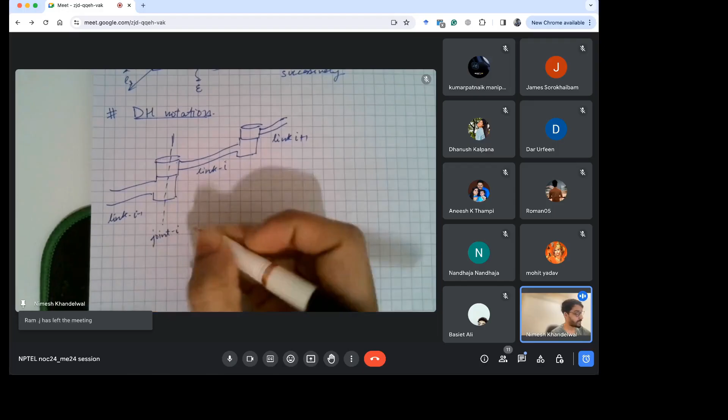According to the convention we are going to use, similar to the convention in J.J. Craig, we will mark the axis between link I minus 1 and I as joint I, not joint I minus 1, because this is the convention we had chosen. In the Schilling convention, this is called joint I minus 1, and the ith joint is between link I and I plus 1, but we are not going to use that convention. And this is joint I plus 1.

So currently we are just revising how to specify the axes, the local axes at every joint according to DH notation. We'll come to DH parameters after that.

So what do we do then? We assign the z-axis at every joint along this joint axis that we have just specified. So the z-axis is aligned with the joint axis, and it is from link I minus 1 to link I usually.

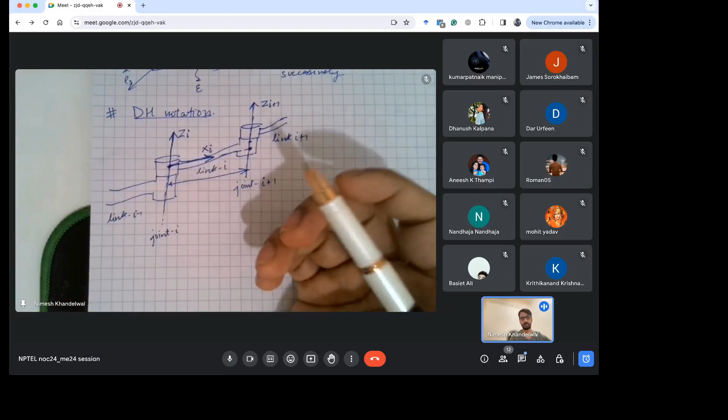And then what we do is we make a common perpendicular between zi and zi plus 1. Along this common perpendicular is xi. And the shortest distance between both these joint axes will also be along the common perpendicular, and that we notify as a.

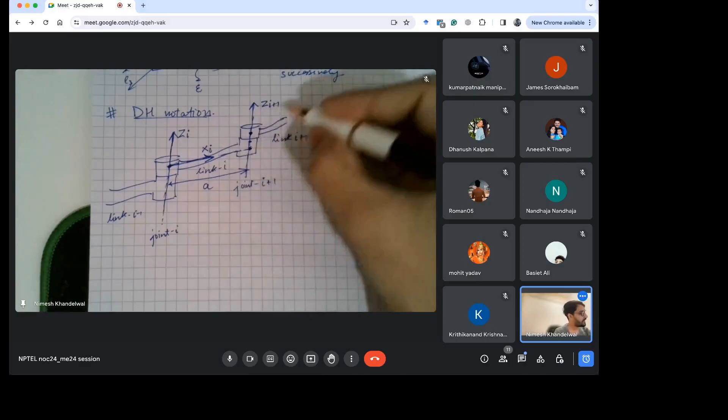I don't think there should be any trouble till now. Similarly, starting with link I plus 1 and between the common perpendicular of zi plus 1 and I plus 2, there will be some other frame. Some dummy frame I'm drawing right now that will help us define xi plus 1. So it is not important that this xi is along your link I. What is important is this xi is along the common perpendicular of zi and zi plus 1.

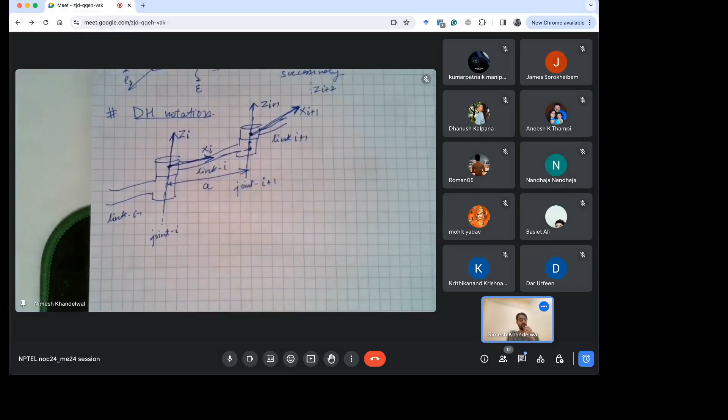So we had already talked about frame transformations in the previous week, right? It's what we initially started with. How do we transform frames? What we usually do in robotics is we want to know how to shift between different frames, how to shift quantities between different frames. If there is some point of interest that I can represent in, let's say, frame I minus 1, how does that point look when I see it from frame I? That is the usual problem.

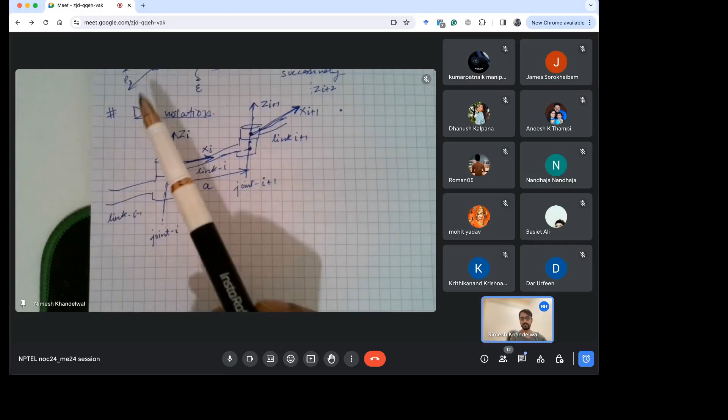There can be successive transformations also related, that if there is some random frame, let's say I plus n, and I can represent a point in that frame, then how does that point look when I see it from, let's say, I plus 1 frame, or ith frame? So for that we need transformation matrices.

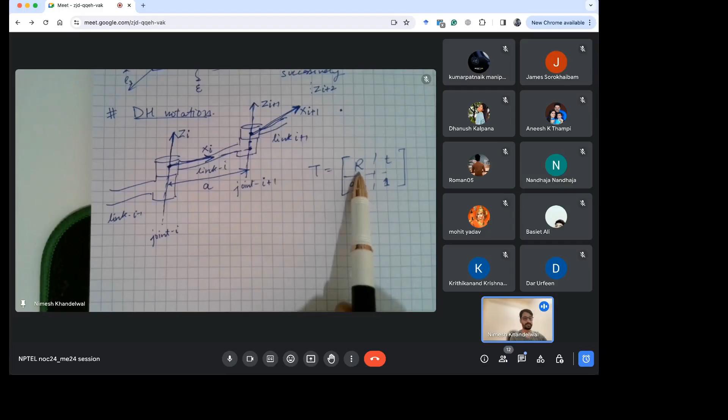You already know that a transformation matrix is defined by a rotation and a translation. So what we need is the rotation matrix between the two frames and the total translation between the two frames. And we already know that we can compose transformation matrices: if from frame 1 to 2 the transformation matrix is T12, and from frame 2 to 3 the transformation matrix is T23, then I can compose them to get the transformation matrix between 1 to 3 just by simple multiplication of the two.

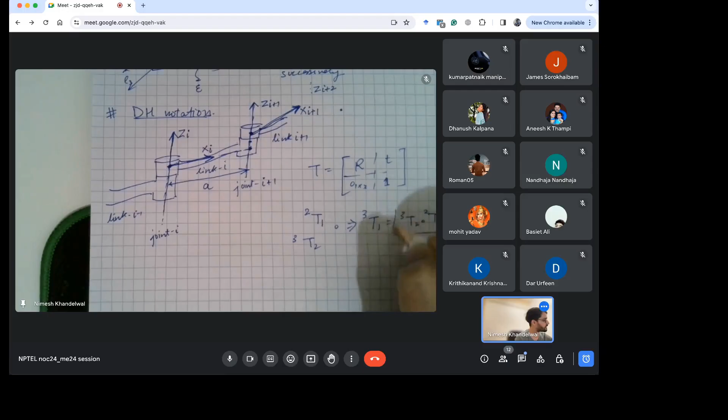Okay, why? Because we have defined a multiplication operation on this set, right? That we also discussed helped us define the SE3 set, the special Euclidean group. So R belongs to SO3 and T, the complete homogeneous transformation, the general rigid body transformation, in this case belongs to SE3 group.

Okay, so all this till now is just what we have learned previously, and I've just revised how we attach axes, joint axes according to the DH notation. Now what will come on to next is DH parameters. Why DH parameters? Because DH parameters help us easily identify these transformation matrices for robots.

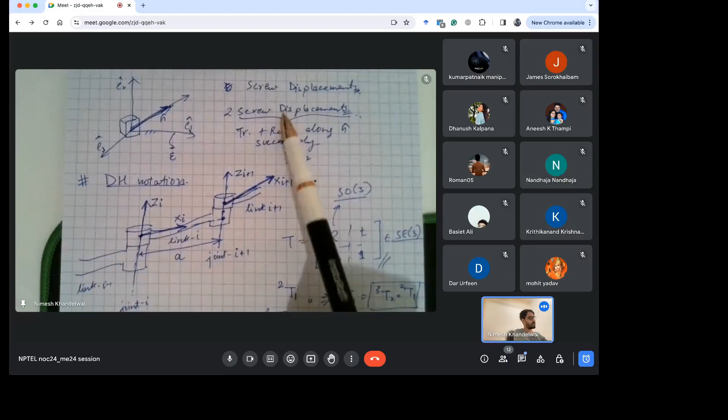For which we can identify the DH parameters correctly, then we can write these transformation matrices much easily. And how do we do that? So I'll first come to DH parameters, then I will discuss how to go from frame I, joint frame I, to joint frame I plus 1. You need to perform two screw displacements that we talked about here, right? That will also clear up the screw displacements a bit for you guys. Then I think we'll move on to discuss some problems.

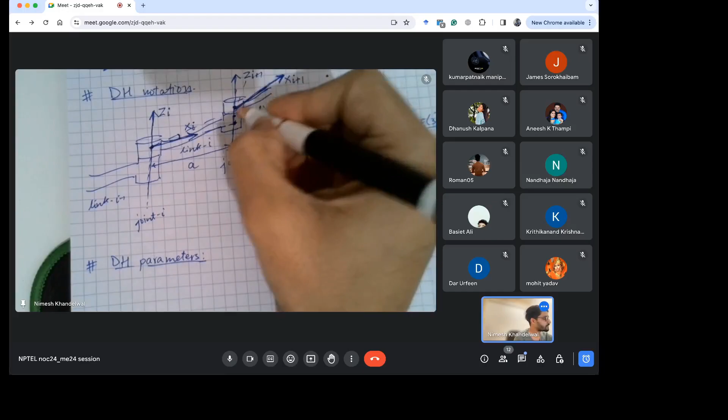Okay, so yeah, DH parameters. There are 4 parameters as has already been discussed, right? So the first one is A, that is the length of the common perpendicular between Zi and Zi plus 1. It is called the link length, the distance between Zi and Zi plus 1 along xi, along the common perpendicular.

Yeah, that's what I'm doing actually, Mohit. Is there any specific detail that you want about them, or is this the exact thing you want, like how do we define DH parameters? So I had already discussed about DH notation, how do we assign frames, joint frames according to DH notation. What I am going through right now is how we define DH parameters based on DH notation.

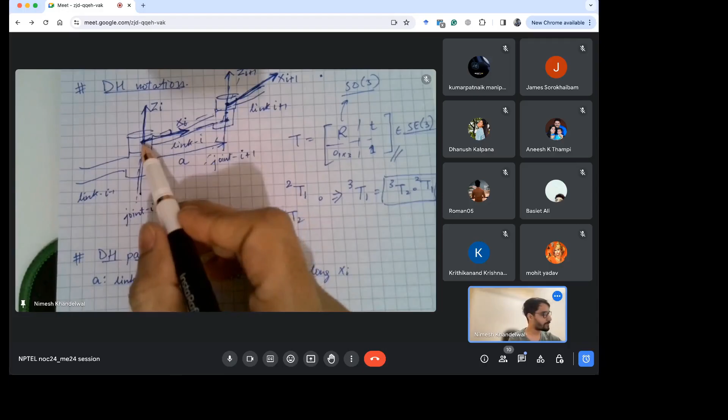So for DH notation, we just assign the Z axis at the joints, and then we assign the xi along the common perpendicular of both the joints, and the length of this common perpendicular is A. This is the first DH parameter.

And then we have alpha. Alpha is called the joint twist. What is alpha? It is the angle between Zi and Zi plus 1 about the same axis xi.

Okay, so these are your first 2 DH parameters, and this is the first set of screw displacements needed to go from joint frame I to joint frame I plus 1. But we are not there yet.

To completely define this transformation, the rest of the 2 parameters are your link offset. So the link offset is the distance between xi and xi plus 1. If I just extend xi here, this distance between them, this is link offset, this is D, and we can just assign I to all of them. This is about Zi plus 1.

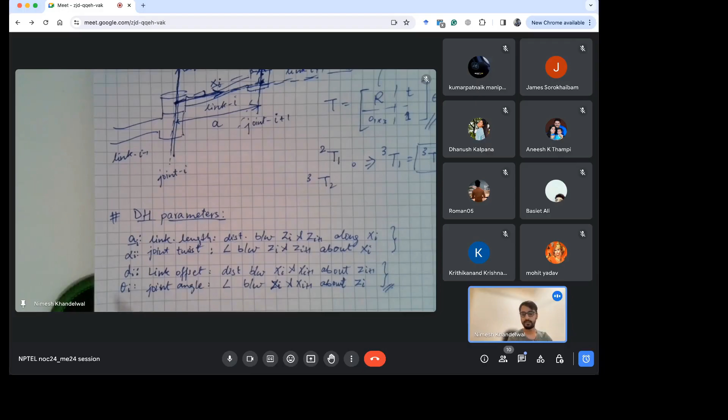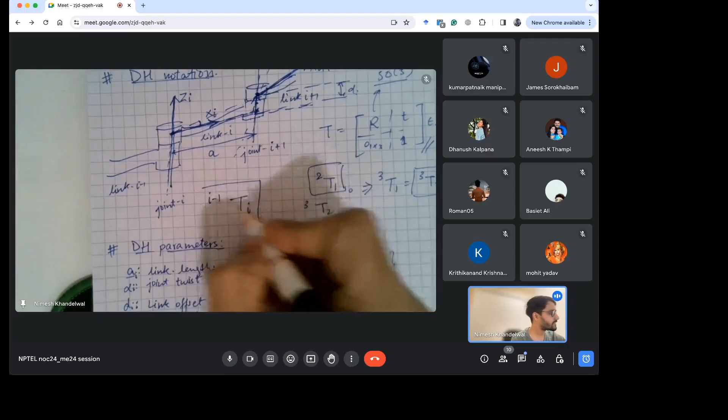Okay, so these are how we define, in our convention similar to the convention in JJ Craig, the DH parameters. And why do we exactly define them? As I mentioned, to make these transformation matrices, particularly from frame I to I minus 1, to define this basic transformation matrix for any two frames, we take help of these four parameters. And how do we take help of these four parameters?

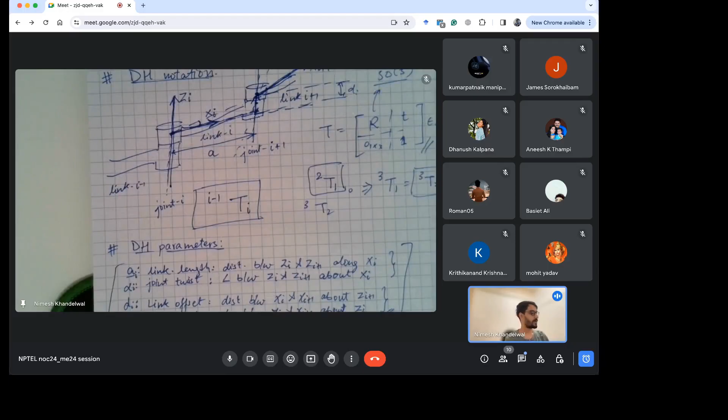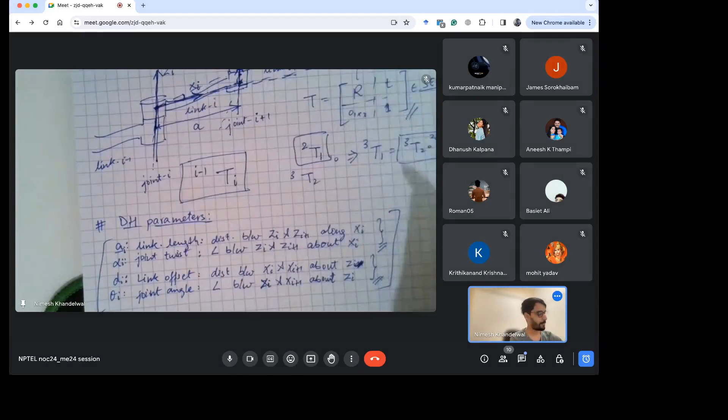Now if you take a look at the first set of screw displacements that I talked about, why do I say screw displacement? One correction: this is also about zi, so this distance is about this axis. So when I defined screw displacement above, what was a screw displacement? It was a translation and rotation along the same axis successively.

Now if we look at the definition of our DH parameters, this distance is basically a translation along xi, and then this rotation is an angular displacement along the same axis, along xi. So this follows the definition of a screw displacement. This is screw displacement 1. And these two: this displacement is also a translation from xi to xi plus 1 about zi, and then an angular displacement, or a rotation, between xi and xi plus 1 about zi.

Okay, so this is screw displacement 2. When we perform these two in succession, we get the transformation matrix, that is when we can actually align frame I with frame I plus 1. If we do both of these screw displacements one after the other for frame I, we would have aligned frame I with frame I plus 1. That's the whole idea of getting transformation matrices - how does the origin of one frame look like in the other frame?

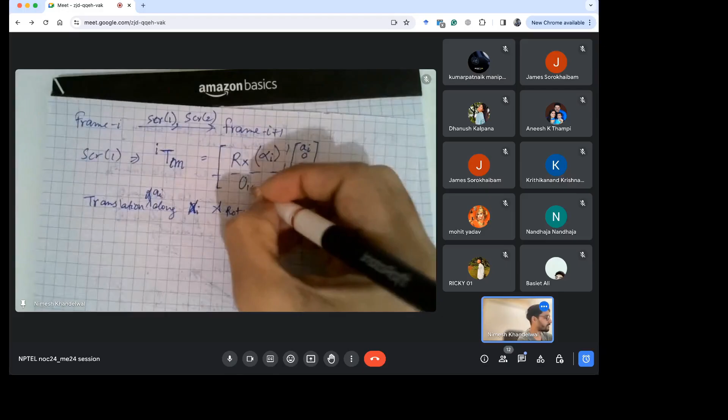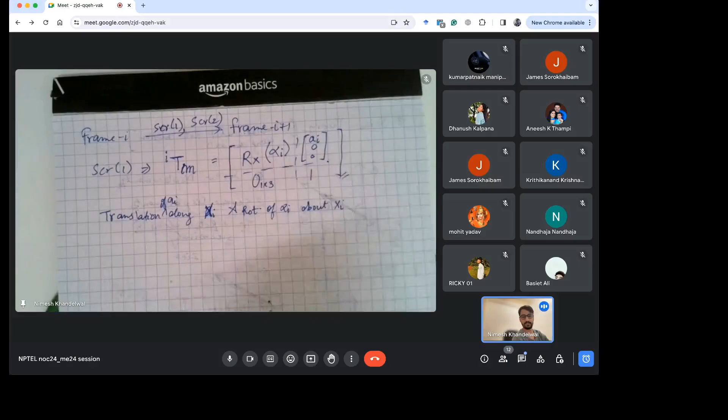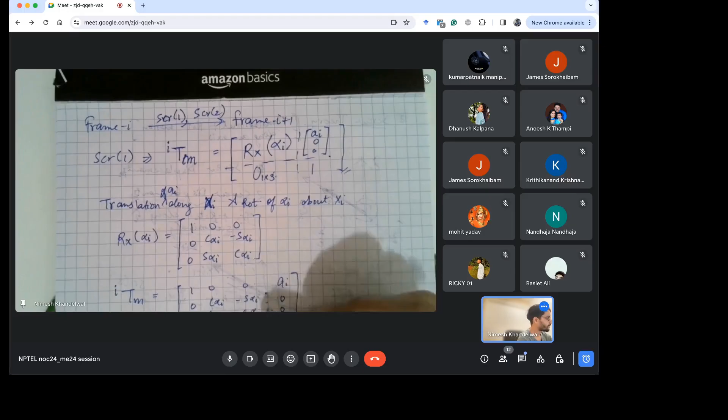Then we'll have our constants here. So this is how our first screw displacement looks like. If we want to write it completely, then we can just expand this Rx alpha I, and I think you are already familiar with this notation by now, where c alpha I is cos alpha I and s alpha I is sin alpha I. If we write this completely: 1 0 0, 0 c alpha I minus s alpha I, 0 s alpha I c alpha I. This is the zeros 1 cross 3 vector, and then the translation part AI 0 0 1. So this is the first one.

Now we need to perform SCR2 after this SCR1, right? This SCR2, as I have said, will take us from this intermediate frame M to frame I plus 1. So this will be written like this - similar to this. This is basically your translation of di along zi and rotation of theta I about zi.

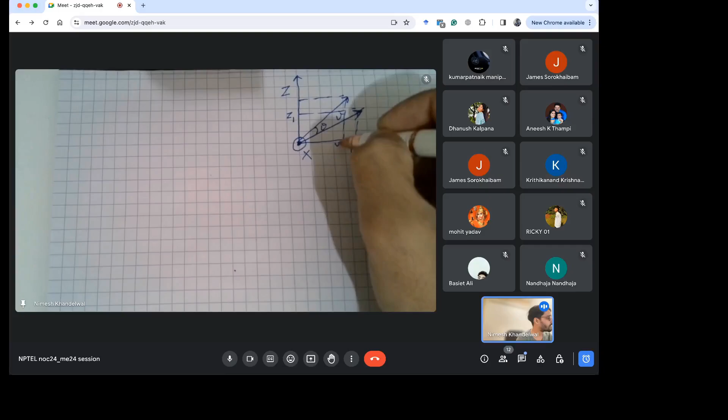We will call its components y1 and z1, and we rotate it by an angle theta. Then the new components are y2 and z2.

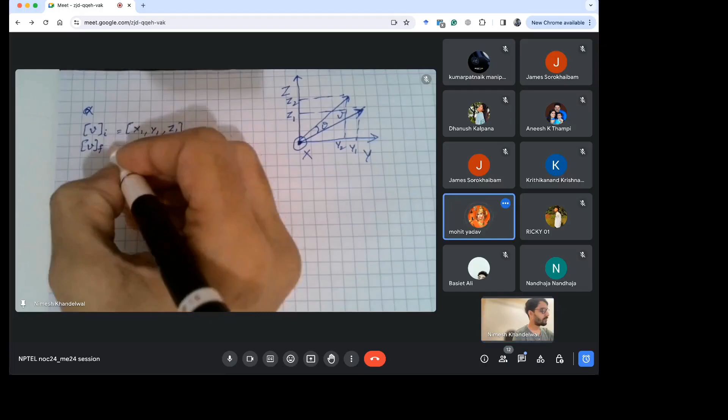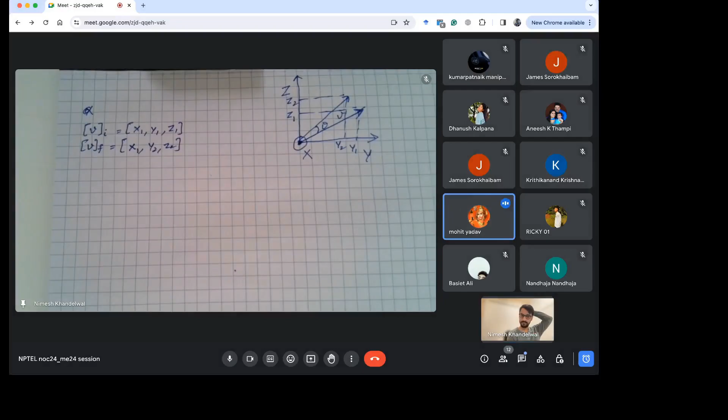So if the initial components of v, let's call this I for initial, were x1, y1 and z1, what would the final components of v be? x1, y2 and z2, right? Now we'll come to how we get y2 and z2, but the idea is that the x coordinate will not change.

The x plane is the same, because we are rotating about x, right? So the only change will be in the zy plane. Now we'll see how - this is a geometry problem you have already solved in 11th and 12th standard.

If this angle is theta, and initially the components are y1, z1, and finally they are y2, z2, how are they related? You'll find they're related like this: z2 is sine theta y1 plus cos theta z1.

So now if I write x1, y2, z2 - the final coordinates - in matrix form: x1 stays the same, y2 is c theta y1 minus s theta z1, and z2 is s theta y1 plus c theta z1.

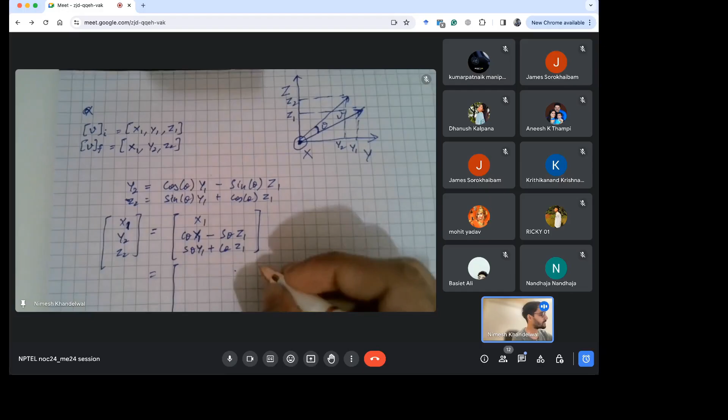Now you see this particular set of equations is linear in x1, y1 and z1. So we can break it into a matrix vector product, where the initial coordinates form our vector, and what will be the matrix for this?

It will be this matrix, and this is what we call the fundamental rotation matrix about x for a rotation by angle theta. You can derive similar matrices for fundamental rotation about y or z using the same principle.

Okay, so let us come back to the DH parameters and screw displacements. We have used them to define the transformation matrices from frame I to m, and then from frame m to I plus 1.

Now we know that we can compose these, and to compose them we can directly multiply these two matrices, because that is the operation defined on these two. So if we multiply these, what we get is the resulting matrix.

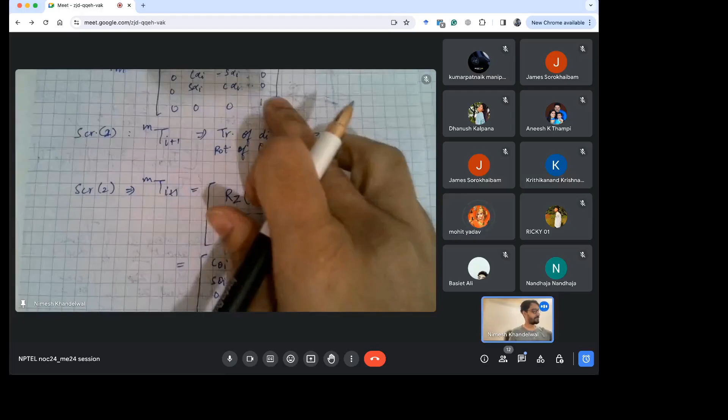I'm not going to do this because it will be just a waste of time, but if you multiply this and this matrix, you will get the final transformation matrix between frame I plus 1 and I.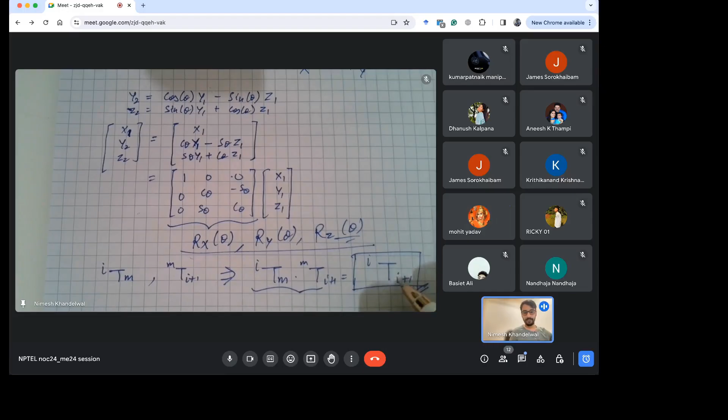So this is basically why we've defined the DH parameters - because once you multiply these and get a final expression for T(I, I+1), you can just identify these four parameters for every joint pair.

Then we just use this final result, already in terms of those four parameters, and plug those parameters in to get the transformation matrix. The final form of this matrix you can find in any book - JJ Craig, Schilling, or any robotics book. That is the reason we use DH parameters - it makes our life easier and standardizes the solution method.

Any doubt in this? No, sir. Okay. Anybody else? Does anyone have any doubt?

Okay, I'm assuming there are none. So what I'm going to do is start with a very simple example of a 2R manipulator, and we'll identify DH parameters for it. Then we'll solve some more problems that we can cook up on the go.

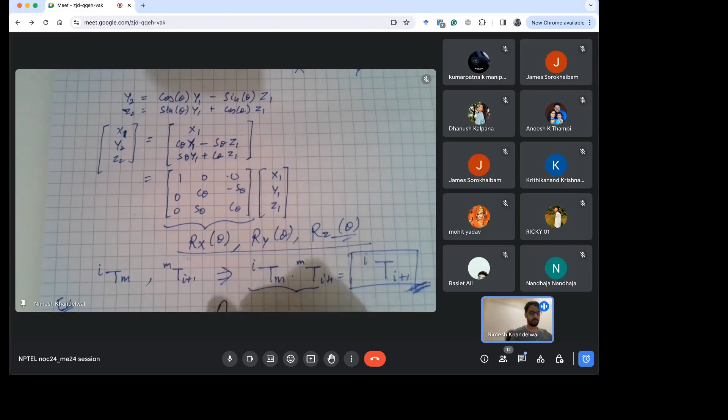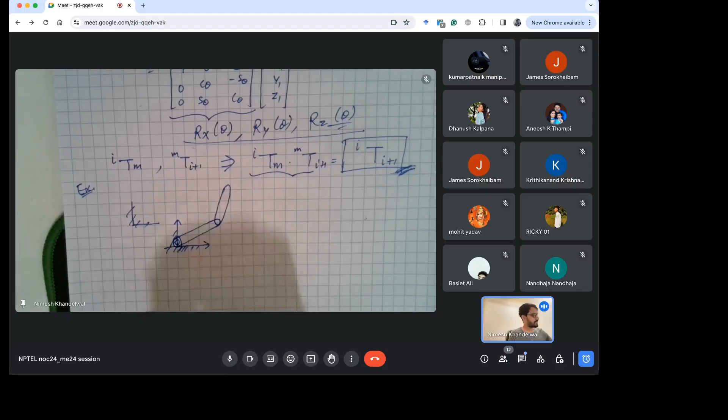So what I claim is that this multi-body system has three links. One is link 0, the ground link, fixed to the ground. Then between ground and link 1 there is a revolute joint, and between link 1 and link 2 there is another revolute joint, and both revolute joints are in the same plane, parallel to each other.

I also define one link 3. I defined it because I know it will make my life easier, and I'll explain why when we're making the DH table. So now we have this multi-body system where all the links are rigid and connected through joints.

The first step to identify DH parameters is to assign DH notation to any system. In this particular case, there are two joints, so there will be two joint axes. At this joint coming out of the plane will be your Z0 and Z1.

Because this is how we have defined everything: this is your X0, Y0 and Z0 coming out, and between link 0 and link 1 we assign Z1. Similarly between link 1 and link 2 we assign Z2. Similarly, between link 2 and 3 we assign Z3 at this point, because these are frames, we can do that. We can say there is no relative motion between link 2 and 3, or there is a fixed joint between link 2 and 3.

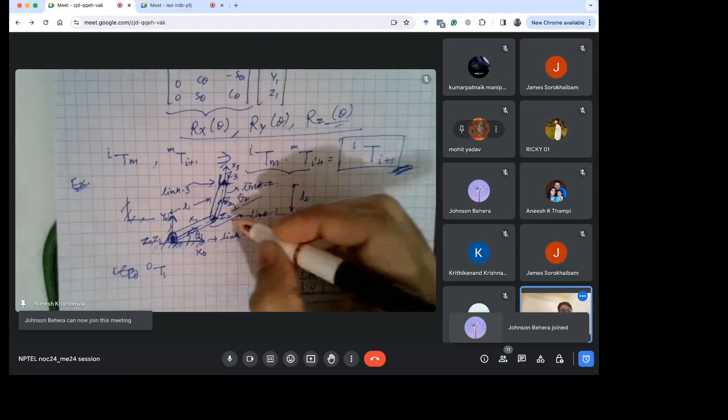Right, yeah, so I understood. So it is between x1 and x2. Okay, so this angle is theta 2. This is why we did not take it from the ground, because according to convention, we want to go from just xi to xi plus 1. So this is the DH table for a simple 2R manipulator.

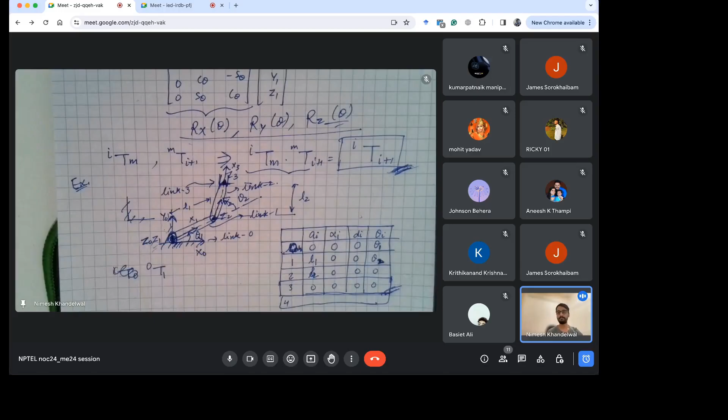And now if you just follow these same procedures step by step for every manipulator, then you can arrive at a solution for the problems. Just keep one thing in mind: these notations to solve the problems - be consistent with the notation you use. Either use the notation sir is using in class, or use a notation from a book, or make up your own notation. Just be consistent with what you choose.

Okay. So what we will do is - James, you have some problems to discuss, right? Yeah. There are quite a few problems, like 5 to 6, I think 1 hour will be good. Or if you want to wind up now, I can continue. Am I audible? Yeah, you're audible. Okay, I think I can continue with the problems. If 1 hour is not enough, you can start. I think, yeah.

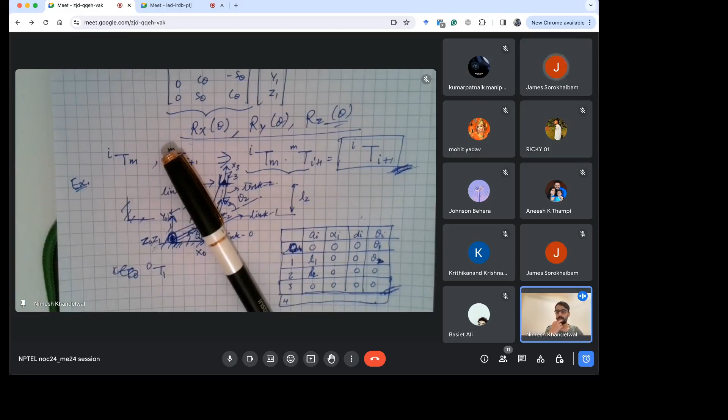I've already made the meeting link, so I think we can shift there right now, right? Because otherwise... no, the thing is, what do you say - if we start now, I think the link is for only 1 hour, right? Yeah, that's why it will end in 8 minutes. So in 8 minutes I can cover one problem. Then what do you say?

Okay, then we can start on X, Y, and Z axis all together. Let me just stop sharing and put point P in a screen. Frame A is given as 101, find the coordinate in frame B. So how we start is... the point in frame A is given as 101, or you can write in a vector form - in calculation we can do in a vector form, which is nothing but 101 like this.

And rotation - rotation is about the y-axis by 30 degrees. So how do you write this? After rotation, you can write AP and apply the rotation... something is happening with my - oh what's wrong? A, B, and BP... something is really troubling me, sorry for that. Okay, I think I understand what happens here.

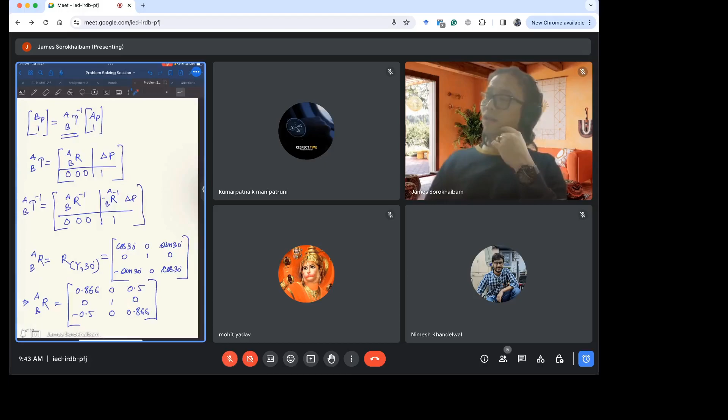So R inverse looks like 0.8660, minus 0.5, 0.5, 0.866. So the first part is done.

This part is done. Now we're left with this. The second part should be R, the rotation matrix. I'll write only the R, okay. R transpose of del P. So this is R transpose, or R inverse, say.

And what do we have? This del P. Del P is this. I need minus, okay. So...

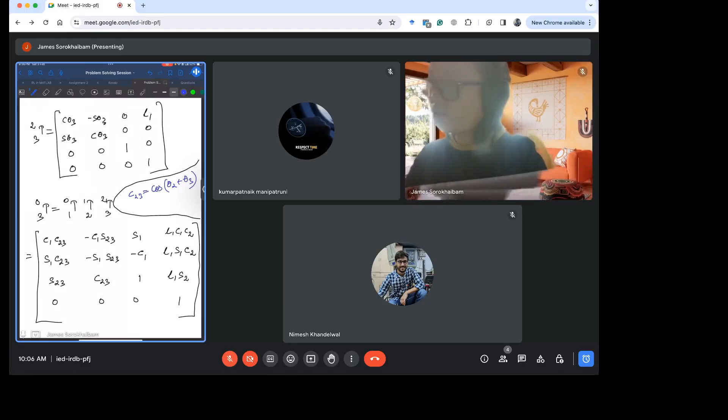What's happening here? C23 means cos of theta 2 plus theta 3. We write it this way. Same with sine. C1 means cos of theta 1. S1 means sine of theta 1. So you can see anything. S23 is sine of theta 2 plus theta 3.

So how do you validate this? How do you think that it is right? There's no way — you have to solve it again and again, and if all the answers are correct, then you can say it's correct. But in one go, how do you say that is correct?

This should be 0, no doubt, because this is a homogeneous 4x4 transformation matrix. This should be 1 — you cannot change this. This is a scaling factor; if you change this value, something goes wrong and gets amplified. And this part should be orthonormal.

And you know what this part is? What's going on here? If I go back to the previous lecture, this del P, which is the translation.

So this part gives you the position of frame 3. It gives you the position of frame 3 — where is this point in space? It's given by the last column. The last column of your transformation matrix is given by that.

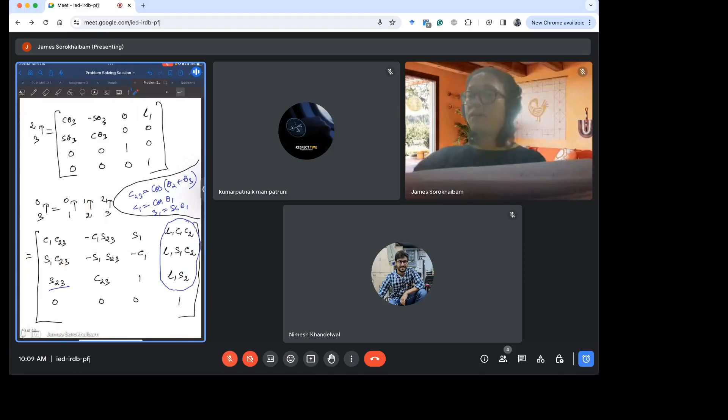Yeah, I think we're done. We are left with just 2 questions — I think DH parameter convention. Yeah, this one — this looks very complex. Even I find it very complex, but it's not. First it looks complex, but it's very easy.

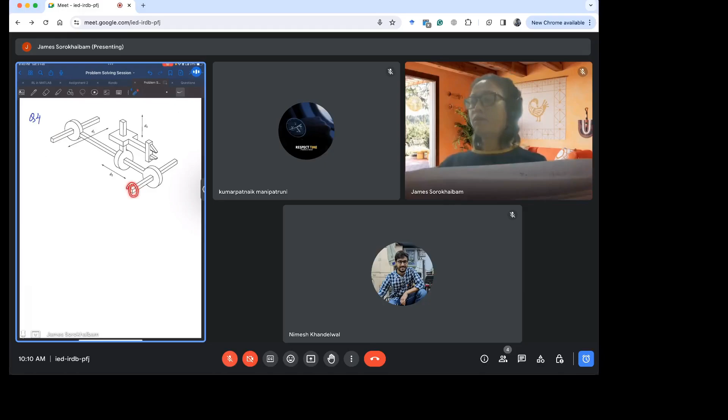You might think that you have to figure out what you call the datum or base, and it's very confusing how to assign the frame. So here, what is this?

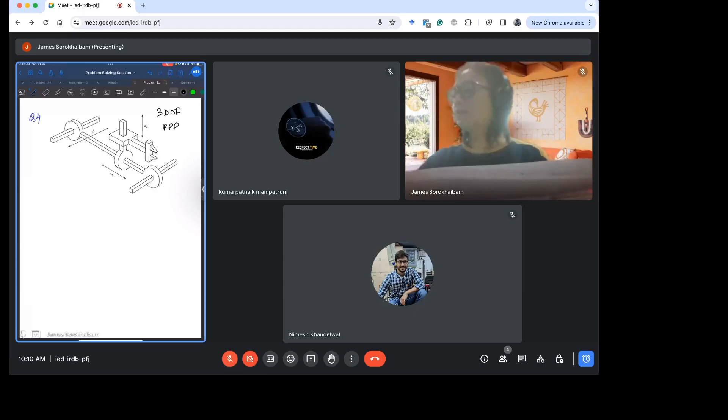This is a 3 DOF, degree of freedom, PPP manipulator — prismatic, prismatic, prismatic. The translation, and the translation, right? So how do we start?

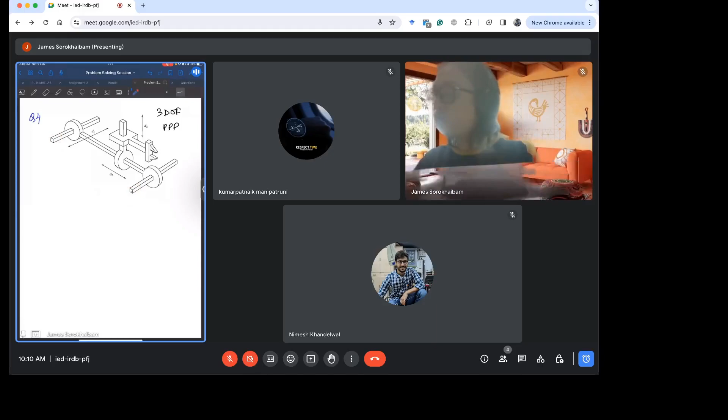We can start from here, or from here — anywhere is fine. This is all about design. So you can start — let's say, because we are dealing with kinematics, it's just displacement. We don't care how many supports we have, so don't get confused with that. The design engineer and the factory guys will handle the design; we're not here to handle such things.

So we have assigned here: X0 here, Z0 here. Why Z here? Because it's translation going on — all the translation and rotation should be along Z.

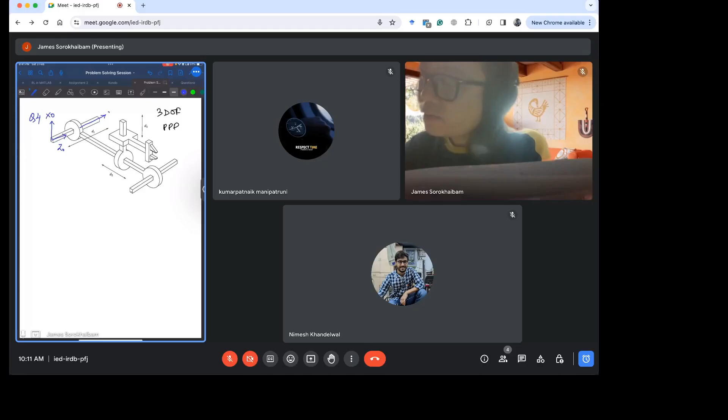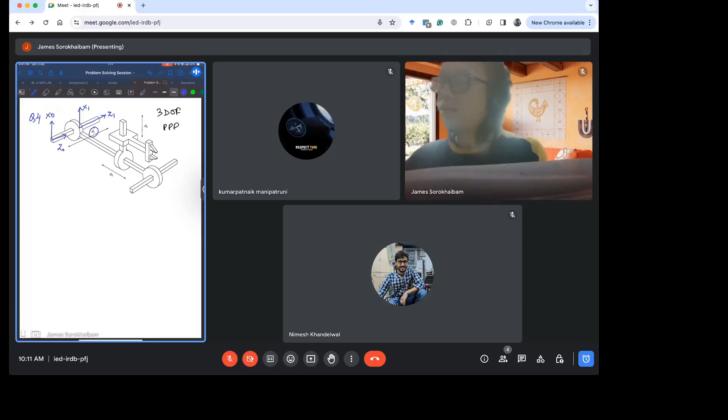Okay, I will assign another Z here, Z1. Then X1 comes here. It makes sense, right? Now we have the translation. This is given as D1. D1 is not a fixed value. D1 means the distance between any X, so between X0 and X1, the distance is D1. It should end somewhere here, but this is how the book gives it, and this is the convention everyone understands by this notation.

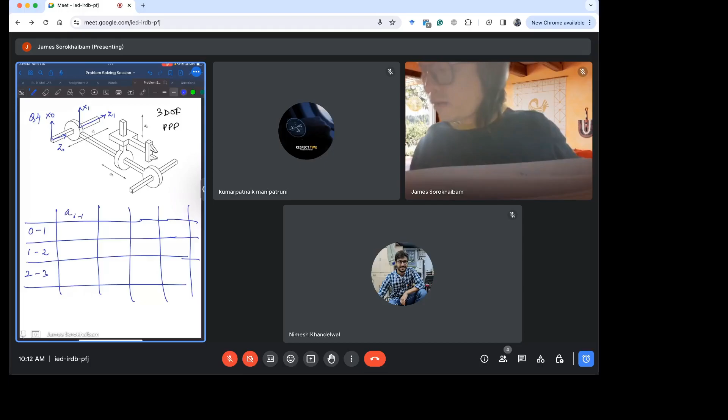So we write the DH parameter 0 to 1, 1 to 2, 2 to 3: A, alpha, D, theta. Remember, this theta is not the variable. The variable here is only D. This is prismatic, be careful.

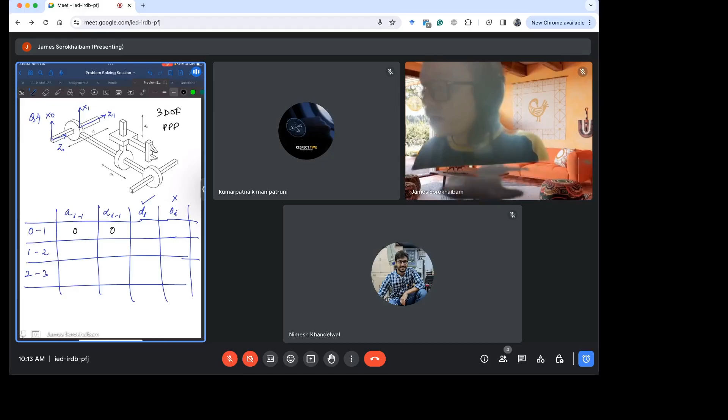So we have the angle between the two Z. How much is it? 0. Distance is 0. And distance between the two X? D1. Don't say that D is measured from here till here, it doesn't matter, this is just where the book gives it. Don't get confused with this. And theta, angle between two X? 0.

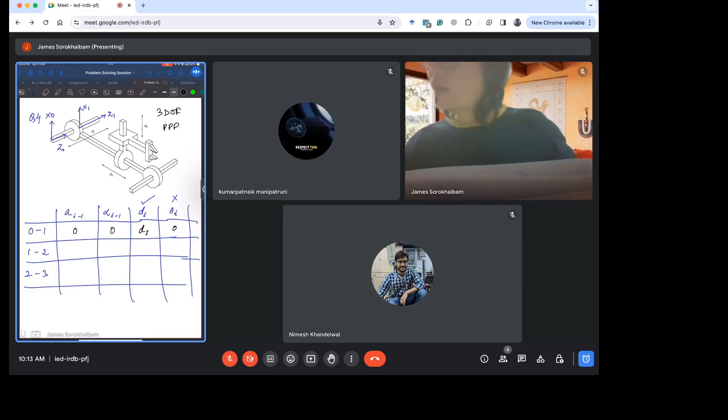So it's now translating. When this body translates, everything translates - this part, this part, this part, this part is the same body. So when it translates along this, it moves. I think we are smart enough to understand the basic mechanism of this drawing, this figure. Then next, what shall we do?

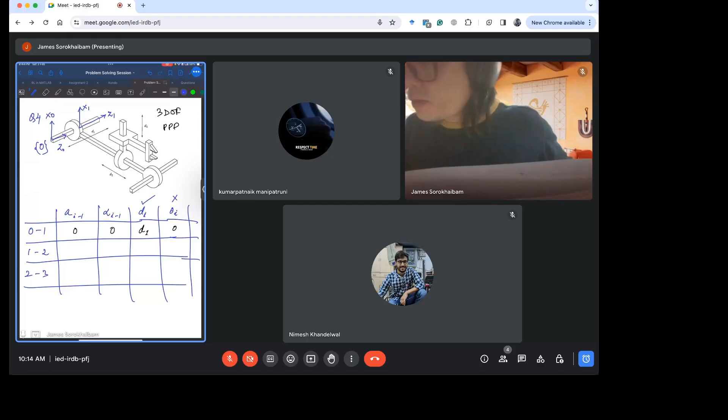So we have the next. This is, I would say, frame 0. This is frame 1. This is link 2. So why I'm writing this is where I'm going to assign my frame.

Translation is along where? Along Z2. And X will be pointing where? This direction, X2. So now it makes sense, right? It depends on how much you practice. So we have the previous X1 here, now the new X2 here, which is the common normal.

And this D2, what does D2 represent? D2 represents the distance between the previous X and the new X, which is D2. So I think now we can write the angle between the two X. Sorry, I'm mistaken - the angle between the two Z, Z1 here, Z2 here. So you rotate it.

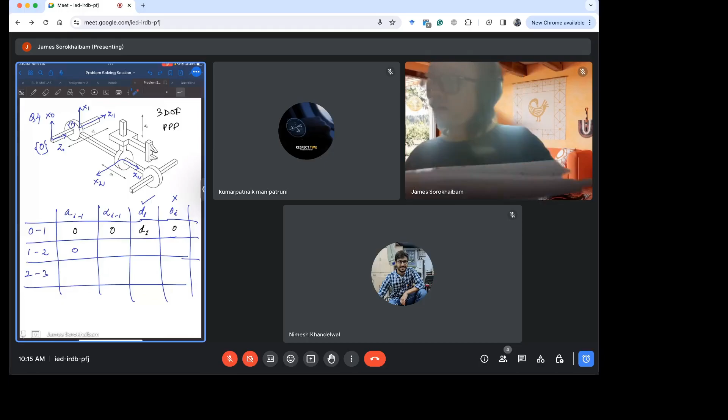First you rotate along X1. If you rotate along X1, the new Z2 will appear here. So then what do we have? We have rotation, I think counterclockwise. So it should be... yeah, I think I'm right now. Sorry for the mistake.

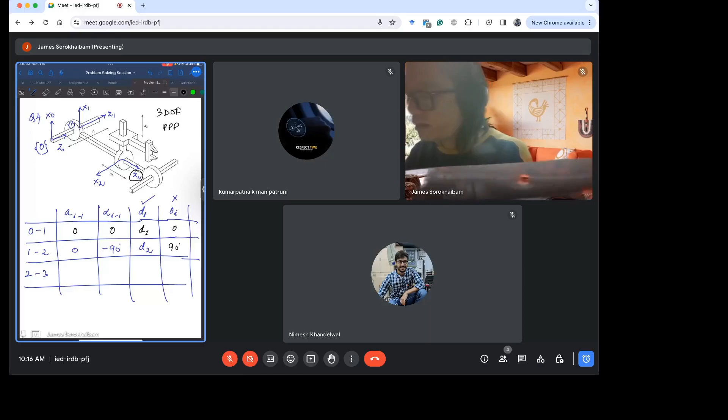And then you have translation, along what? Along Z, which is the distance between the two X, X1, X2, which would be the variable of our interest, D2. And then we have another rotation - rotation along Z2, by how much? By 90 degrees. And it makes the angle between X1 and X2, this angle. This is the direction of X1 and this is X2, which is 90 degrees.

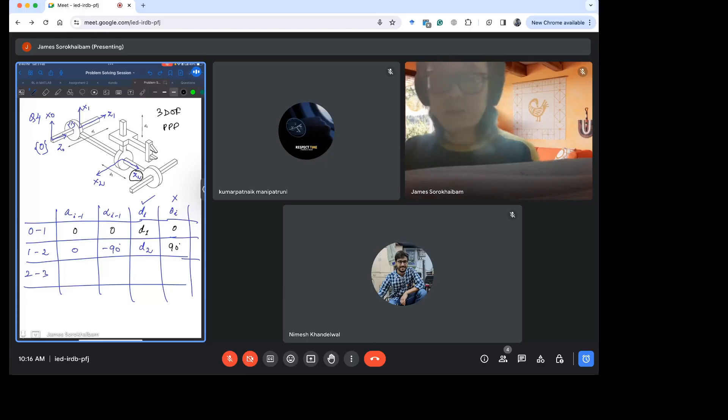Yeah, I think now we're correct, in the right direction. And the last transformation, what do we have? Our Z should be pointing in this direction, Z3. And what do we do with X? We can just leave it like this, X3, right? So now D3 represents what? The distance between the two axes. So this will look like 90.

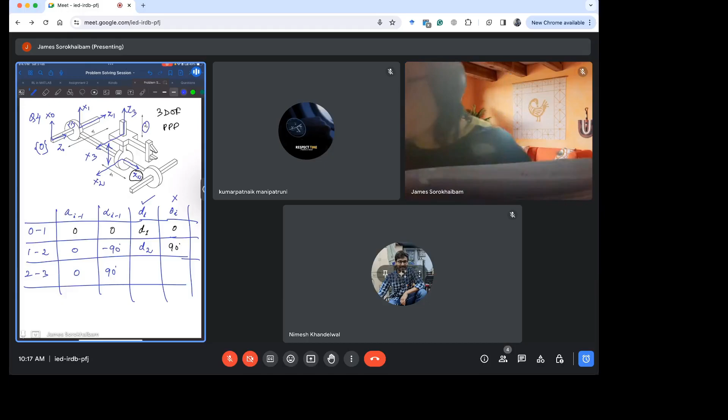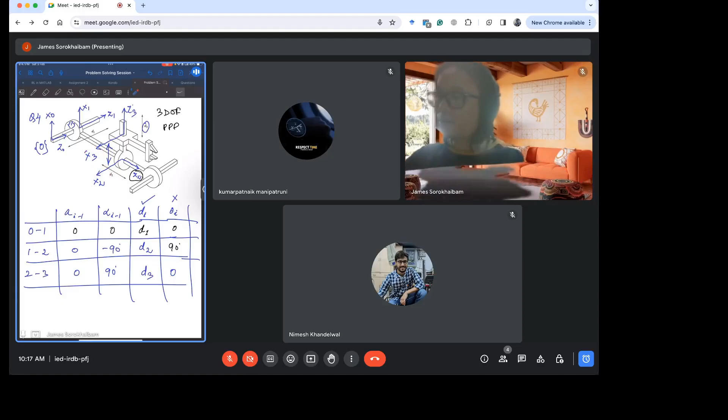Why 90? I'm rotating this Z by this Z along X2 by 90 degrees. And then the variable is here, and then 0 - no rotation, the angle between the two X is 0. Angle between the two Z, which is Z2 and Z3, is 90. I think we're done with the DH parameter convention, notation, assignment of DH parameter and the frame.

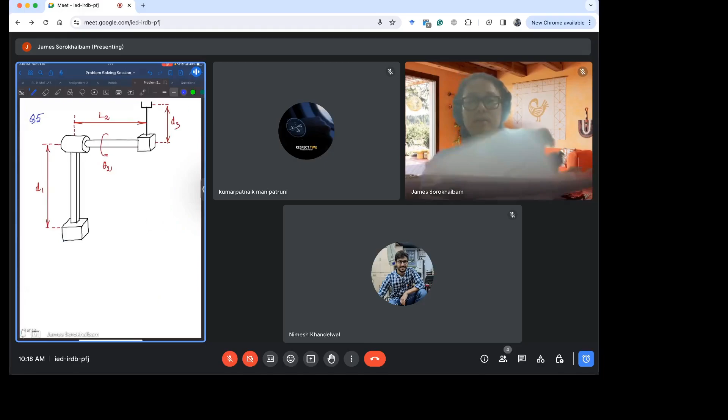Prismatic, rotation, then translation, and then another translation. So we can make it fast. I think we're out of time. 2, 2, 3.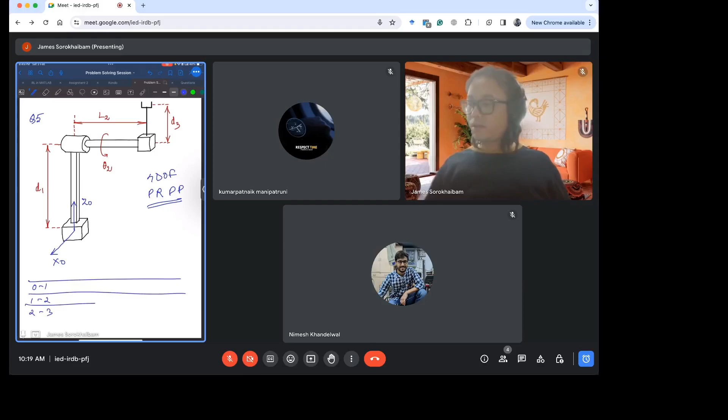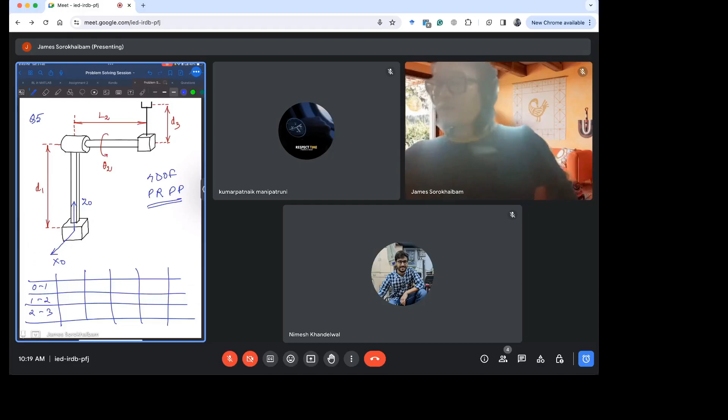You might ask why we're doing only till the third frame, not the fourth frame, why we're considering that, like in the previous case. This is to do with the kinematics, because our goal is not to find the position, but to find the velocity, and all that we'll deal with later.

Alpha, A, D, theta. So Z should point in this direction, Z1, then X can still be here, X1. Then the distance between the two X is the variable, and all the remaining things remain unchanged. Nothing is changed between the two frames except the relative distance, so I think all the other parts remain 0.

Next can be rotation. So what rotation is going on? We can assign Z2 here, in this direction, because we're going to rotate this thing. This is fixed, and we're going to rotate all of this along Z2 by theta 2, which is shown here.

So where do we assign the next X? X2 will be the common normal. Then between the two Z, it's minus 90. Am I right? Minus 90. Yes, minus 90, between Z1 and Z2.

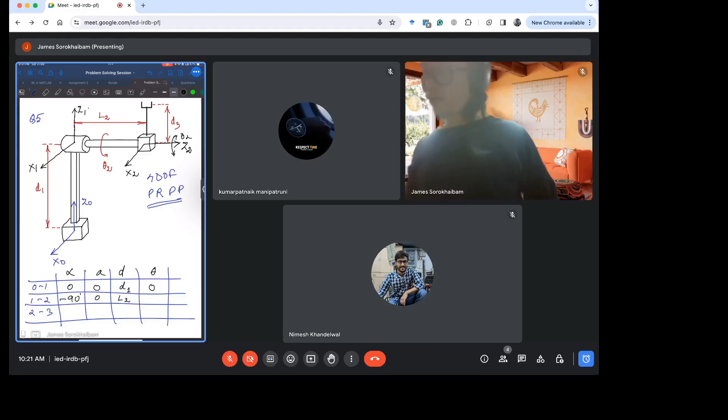And then the variable of our interest, L2, is here - meaning the distance between Z and something which we don't know. But actually both are in the same plane, so this is the same as this, which is L2. L2 will be here, and it's not of our concern now.

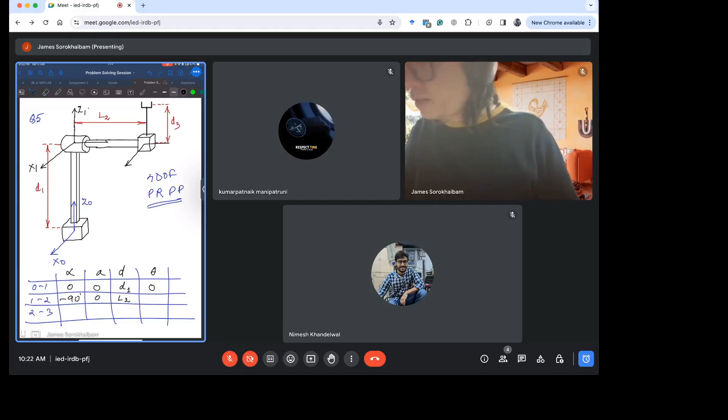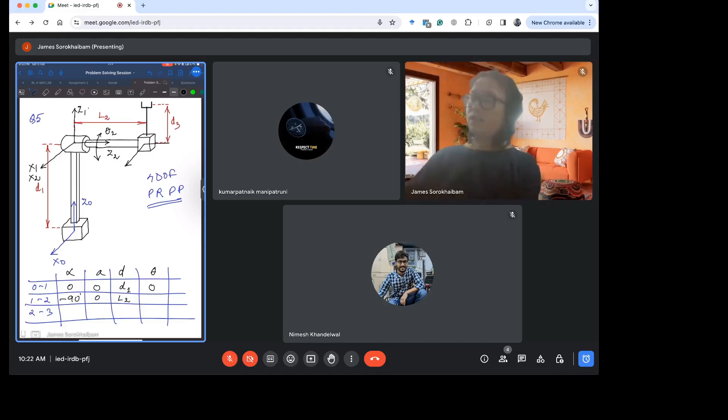Yeah, I think I made a mistake, sorry. So Z1 was here, next Z2 can be here, and then we have X2 here. Why? Before rotation, remember theta - which theta was it? Theta 2, right. If theta 2 is still 0, then X1 and X2 will coincide. I think I'm making it right.

Does it look like this changes here, from 1 to 2? So we have X1 and X2. Z1 and Z2, we have how much? Minus 90 degrees, and then everything else should be 0, and the rotation variable should be theta 2. Yeah, right, we're on track.

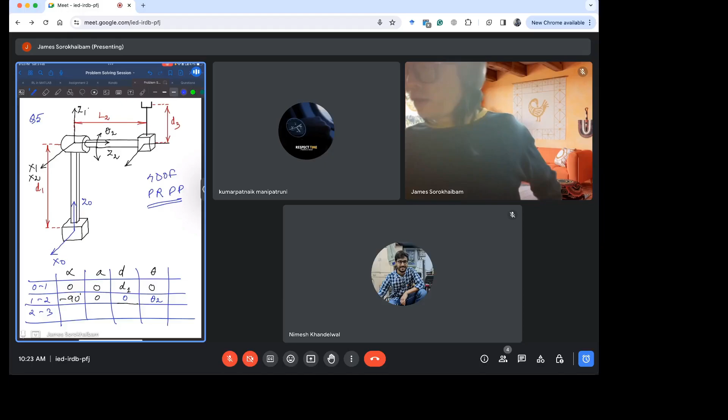We have Z2 here - why? Is it minus 90, from 1 to 2, for alpha? Both angles are perpendicular, Z1 and Z2. This angle - you got it? This is how much? It's minus 90, right? Minus or plus? Minus, it's clockwise. So anti-clockwise you take as positive. Okay, clear?

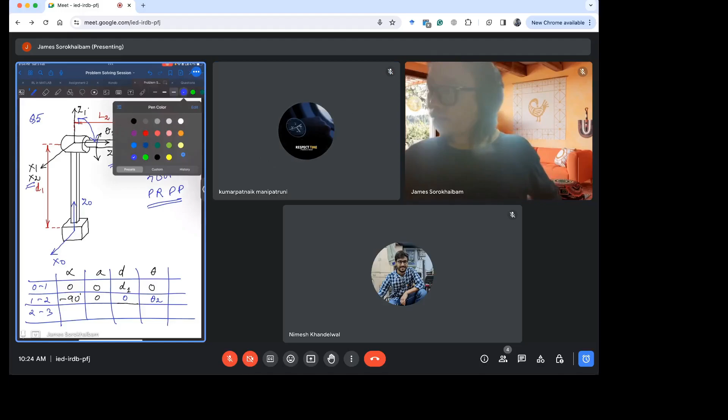And then we have frame 2, and now we'll deal with it. So one prismatic is done, one rotation done, and we have another prismatic here. So what do we assign here? We can assign Z3 and X3. The distance between X2 and X3 is L2, which is the variable of our interest.

Angle between Z is 0, distance between Z is 0, distance between X is L2, angle is 0. Prismatic is done. I think we are left with the last DH.

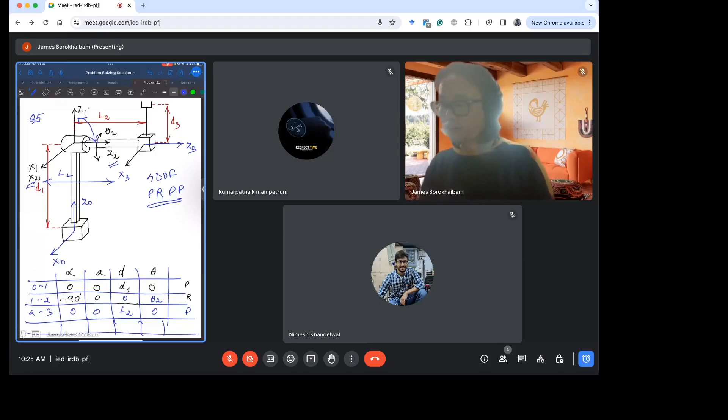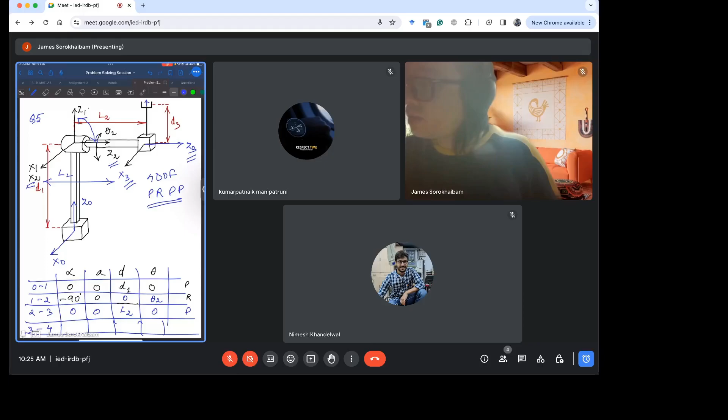3 to 4. X2 here, X3 here, Z3 here. So another translation should be along this direction - this direction, which should be Z4. So how do you bring about Z4? Z4 should be a rotation of Z3 by how much?

90 degrees, this is positive 90. Okay, positive 90, right, anti-clockwise. And the distance between the two Z is - I was fast because I don't have much time, only 1 hour - the distance between two Z is 0.

And then where is the new X? The new X will be here, X4. Why not here? You can think about it. The new X4 will be here if D3 is equal to 0. But D3 has some value, let's say 3, meaning 3 centimeters. So what you do is rotate Z by 90 degrees, positive 90, to get Z4, and you have X3 rotated by 90 degrees.

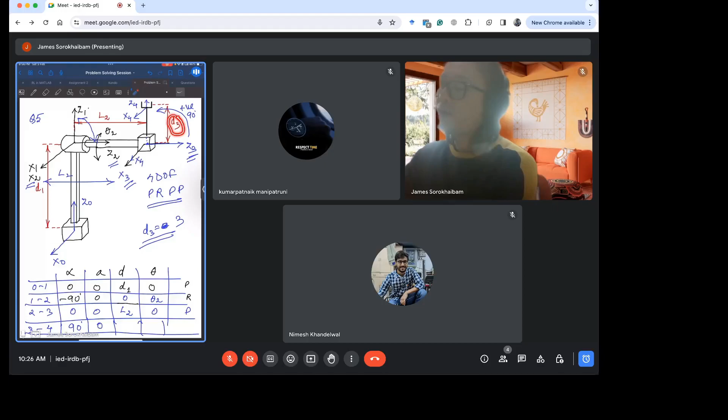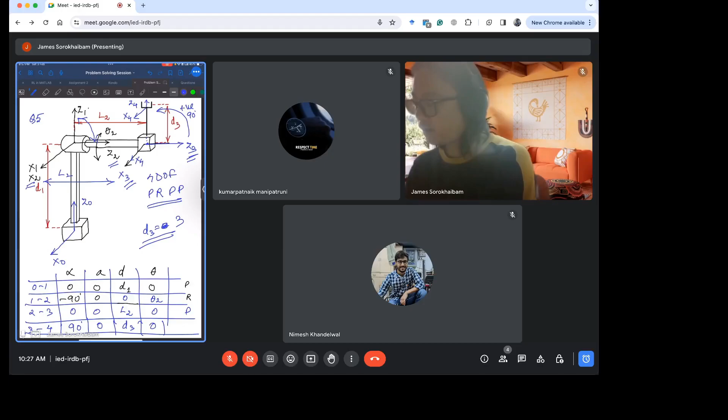And then the translation will be brought about by this variable D3. So what you have now here is D3 and theta. What is theta? 0, right, because X4 and X3 don't have any angle between them, it's 0 angle. So with this, I think we are done with the frame assignment and DH parameters.